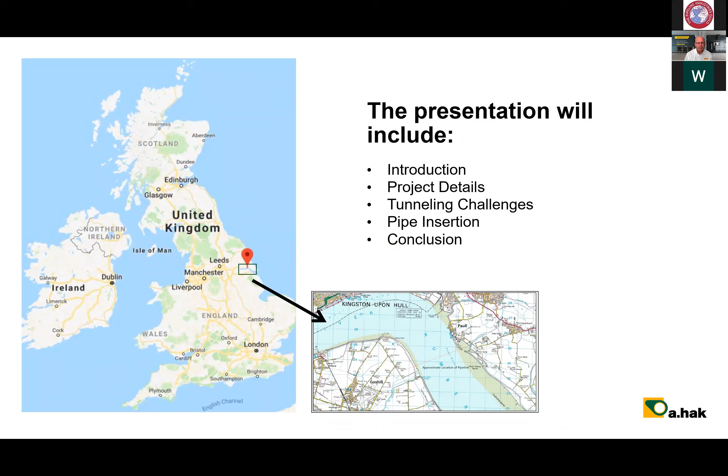What was the business case for National Grid? There was an existing pipeline which was built in 1984. It was trenched through the Humber River, and this pipeline is a very important one for National Grid, transporting 20% of the whole British gas consumption. There were sections of the pipeline at risk because of erosion of the riverbed. There is a tidal difference of 6.5 meters in the Humber, so very, very impressive.

There were some short-term solutions made to protect the pipeline, but National Grid needed a long-term solution to replace this existing feeder pipeline with a long-term stable situation, which, at the end of lots of evaluations, was a tunnel. The project was awarded in 2016. It was decided to build a tunnel and to insert a pipeline in this tunnel.

The award was to A.Hak, Skanska and Porr in the joint venture, and the award was made on the basis of an alternative bid. We as joint venture made an alternative bid, in particular how to install the pipeline, and this method we proposed was the alternative.

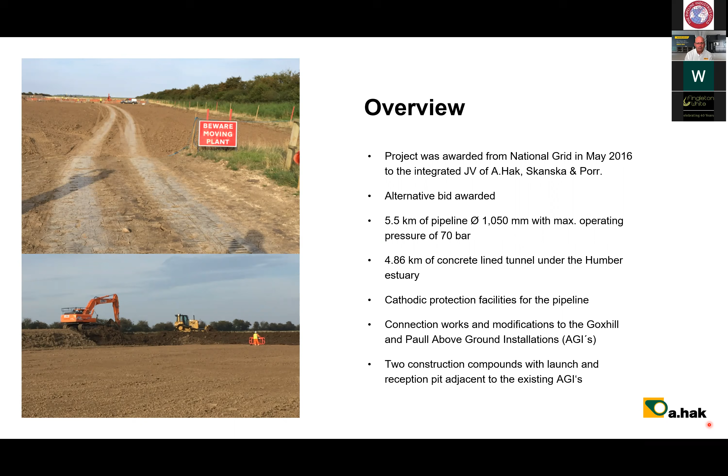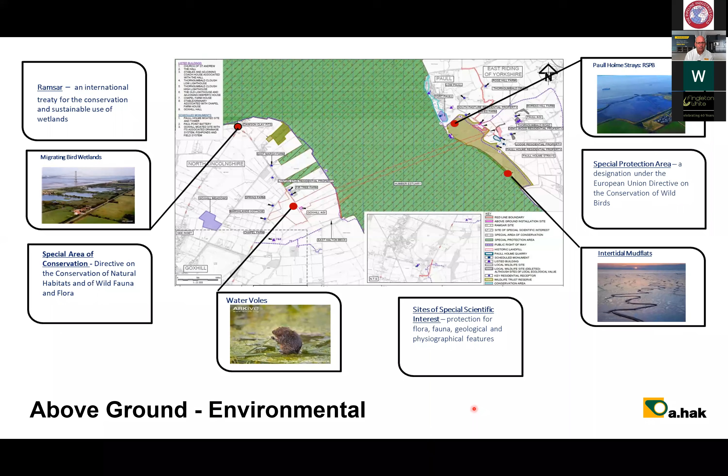Above ground, it was a very environmentally sensitive area, and we had to protect all the wildlife there, badgers, birds, etc., which asked a lot of attention from us, which we did with lots of success, I have to say. Underground, the geology we had to drill in was mainly chalk, and the tunnel was pretty horizontal, going from Goxhill to Paull.

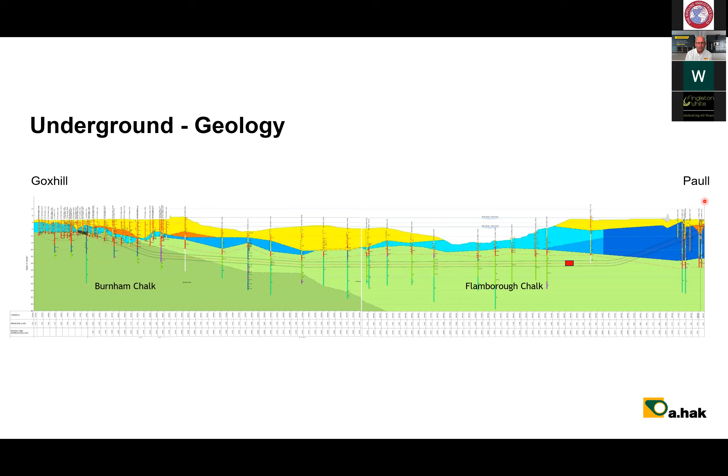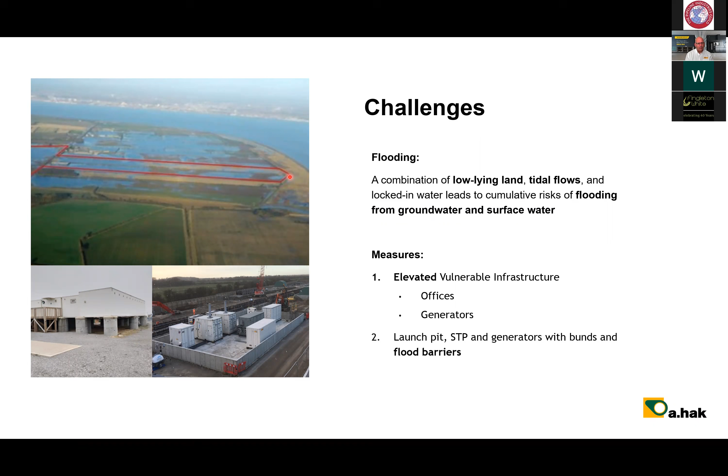Lots of challenges. If you see my dotted red dot, this is the footprint, the area of the project, which was one year before we entered there. The floor was completely flooded. So there was a chance that it would be flooding again under special circumstances. So all the vulnerable elements like offices, generators, etc., we had to lift up to protect ourselves from the water.

Another real challenge was that the tide of the Humber River had a difference in height of 6.5 meters, which had an impact in the tunnel during execution of the tunneling as well, where we had to work in compressed air, where we had to go up to 3.5 bar overpressure, compressed air in the tunnel area.

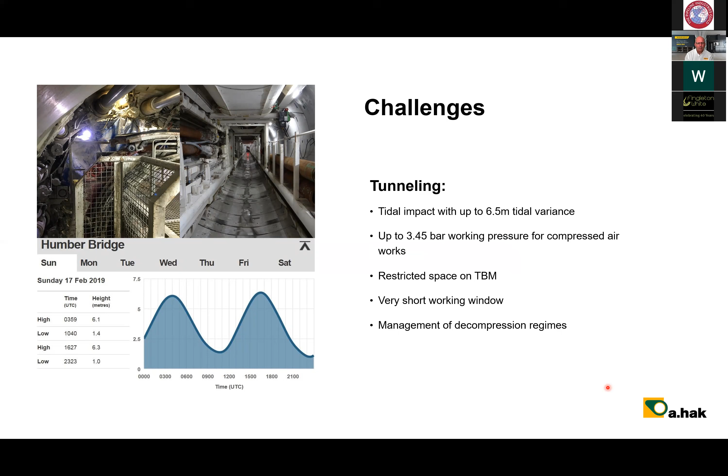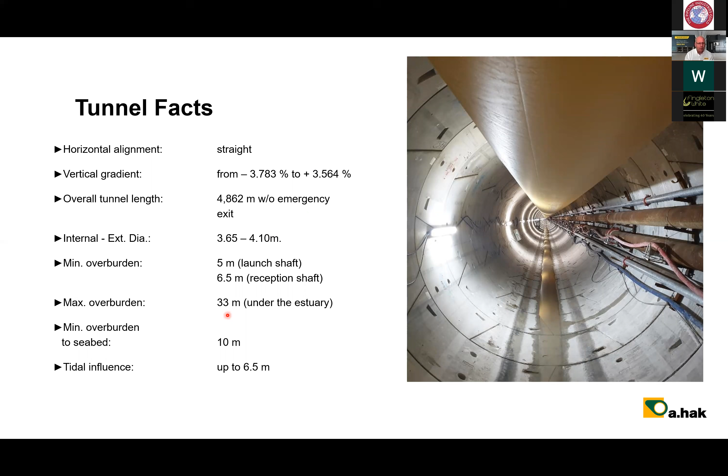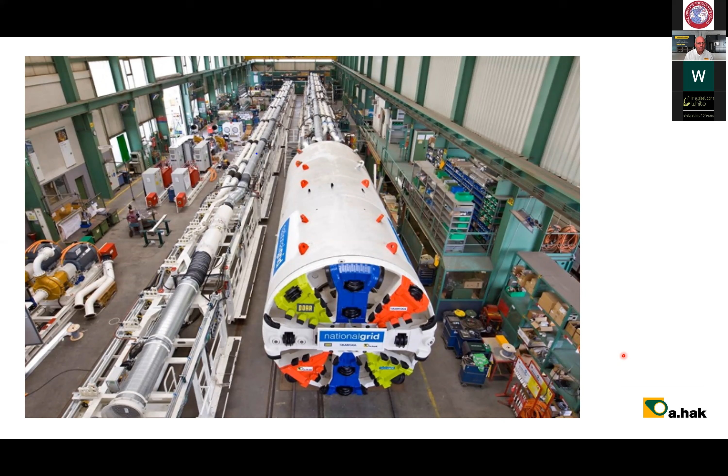The tunnel itself had an internal diameter of 3.65 meters, externally 4.1 meters. It was pretty horizontal, and under the estuary of the Humber River, we drilled with an overburden of 33 meters. This is an image of the TBM, the tunnel boring machine. It was a machine of Herrenknecht, made in Germany, brand new on specifications of the joint venture. It had a length of 110 meters, 500 ton weight, and this is during the factory acceptance test.

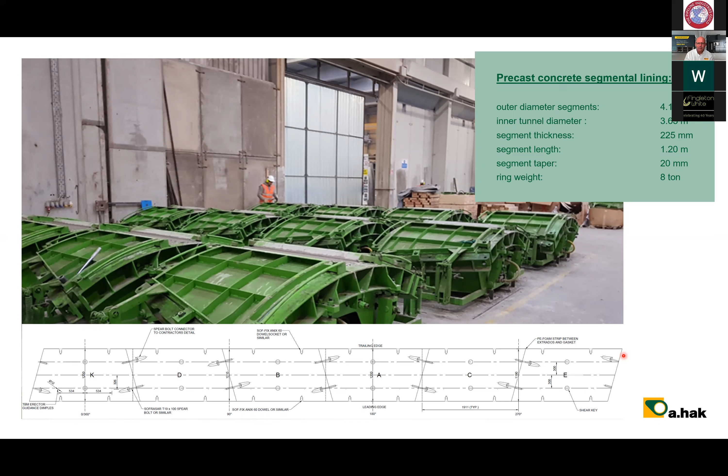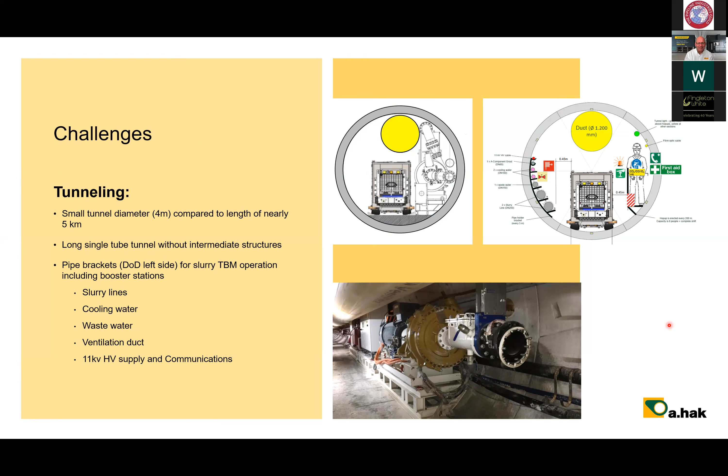We made the segments for the tunnel in Ireland. Every ring had a weight of 8 tons, and here you see the challenge. The internal diameter of the tunnel looks bigger, 3.65 meters, but when you see what to install in the tunnel, like this infrastructure to feed the TBM, to bring fresh air to the front, and then bring the tunnel rings with this machine, then you see everything is pretty narrow.

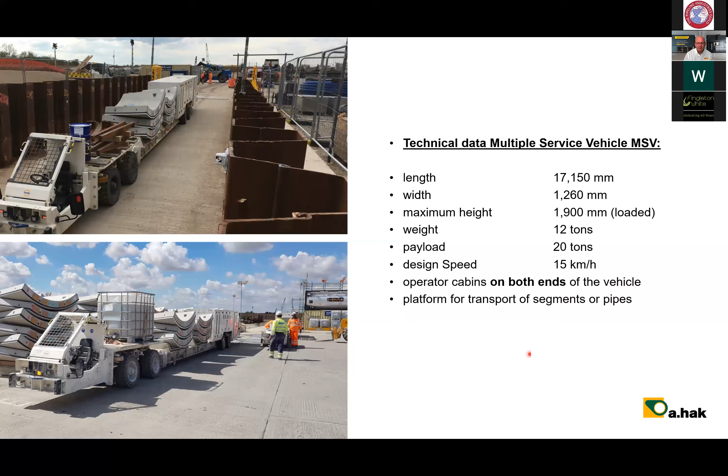This shows the multi-service vehicles, the MSVs as we called them, 30 tons in weight, own weight 12 tons, with a payload of 20 tons of these segments, and we could drive in and out in the tunnel. We did our own safety and training program. All the members who want to come on site or work on site are trained and inducted by us. And here you see, by the way, the office facilities all lifted up to protect the office against the flooding.

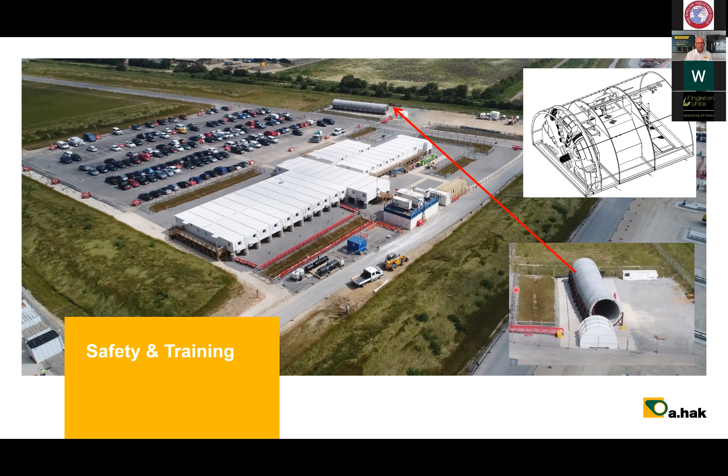As project management, I was in the JV board, and every month we had a kind of dashboard where we tried to capture the highlights and the lowlights on the project in a one-pager, where our project manager had to inform us on topics like safety and quality, production and performance, the SWOT of the project, and the commercial side of life. That is combined with a monthly joint venture meeting and a safety tour, which we did together with the client on all aspects of the work.

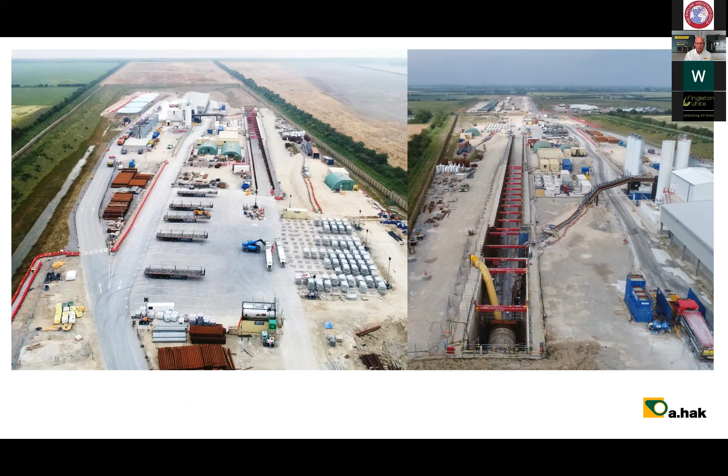Here you see a very nice overview of a part of the project site. Here you see in my red dot the start shaft of the TBM. At the horizon you see the River Humber, and here you see a little bit the dimensions of the project. At the right-hand side at the horizon you see the pipe stock and the stringing yard. So here you see to the Humber, and to the other side, this photo here, the start shaft again, and here you see all the pipe stocked, and the area where we are going to string the pipes to prepare the tunnel.

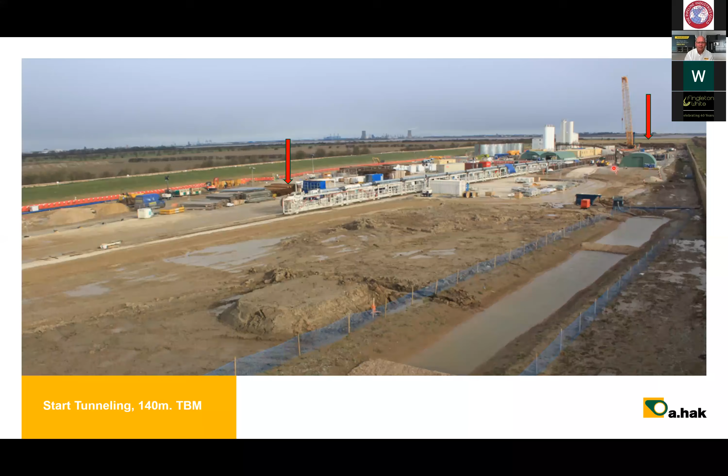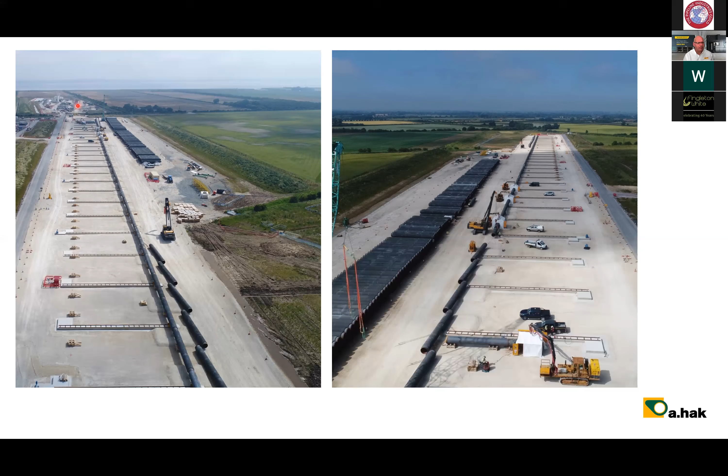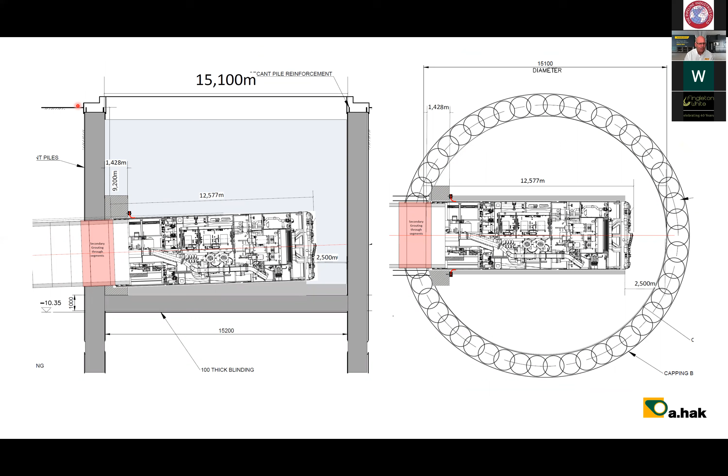So the TBM tunneling took 14 months to arrive in this reception shaft, and this reception shaft had a diameter of 15 meters. This impression shows how the TBM enters into the shaft, and after we take out the TBM, there you see an impression of how we install the pipe and connect it with a kind of gooseneck to bring the pipe up close to the surface.

After we developed our own safety culture program on site, after a few years of hard work, we were recognized as the most improved contractor for National Grid. That was very good for us, having this after lots of hard work, of course, you can understand that.

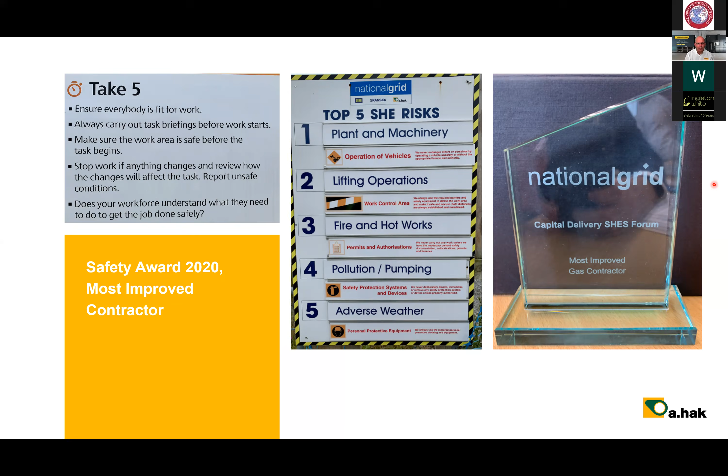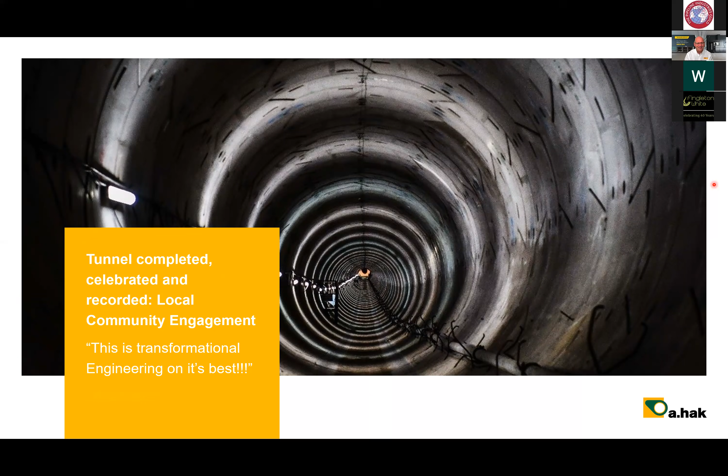When we completed the tunnel, that was really a breakthrough event in itself, and we invited a lot of stakeholders, people who lived in the area, of course some very important people of the client, and one special guest, Graham Boanas, who already crossed the river in a wetsuit, and now we invited him to cross the river again in the tunnel itself. This will be shown in a very short video in the coming minute.

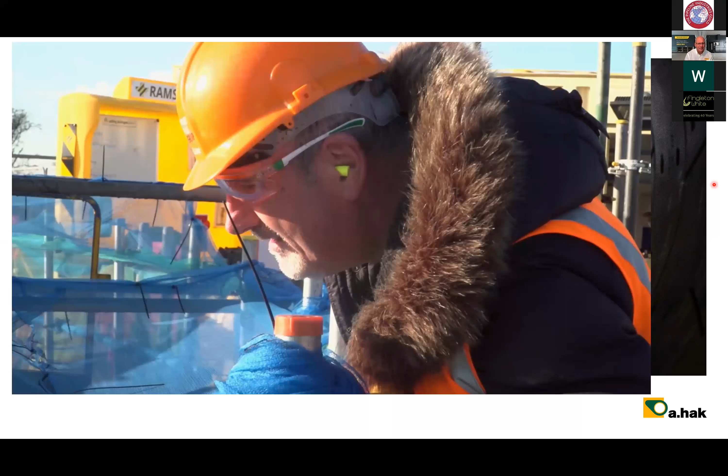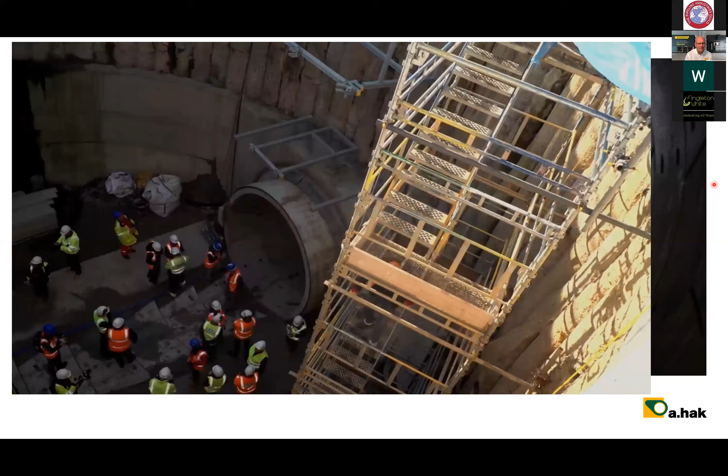We're getting ready to push our 5-kilometre pipeline inside the tunnel. This is going to be a world record breaking event. It will be the longest hydraulically inserted gas pipeline in the world.

We're really pleased today that Graham could come and join National Grid and the project team to celebrate this massive engineering feat of building a 5-kilometre tunnel underneath the River Humber. This is transformational engineering at its best, and we're really pleased that we're able to celebrate this today. It's a massive project for National Grid and for our partners.

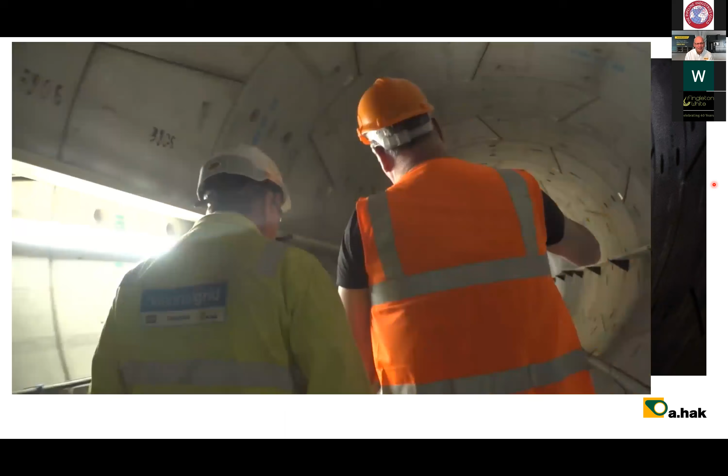Well, today has been a fantastic experience for me. I've actually had the opportunity to walk underneath the Humber, and I don't mean underneath at high tide, I mean actually underneath in a tunnel, and it was just fantastic. What a great piece of engineering. We look at things like the Humber Bridge and what we're doing development-wise in the city, things like the wind industry, and then we look at this and it's just a fantastic piece of engineering. I didn't even know it was here, and many of the people in Hull won't know it's here.

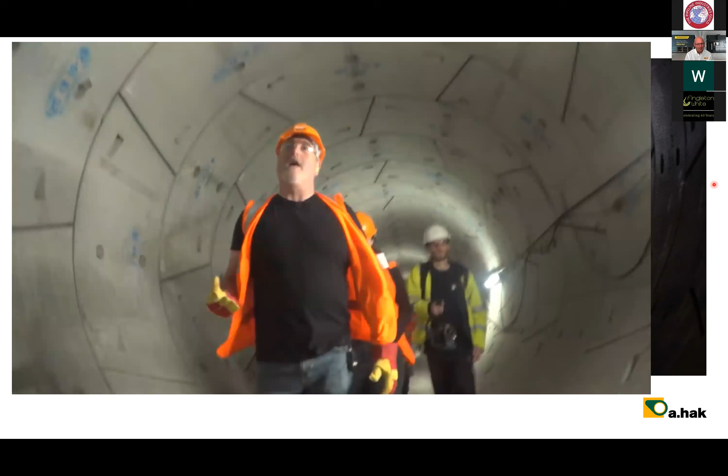Talking to one of the guys down there, it was fascinating to know that now it's finished, they're going to fill it back up with water. So we've walked in it dry, now it's going to be full of water. Amazing. I must now hold the record for being across the river in the most different ways. I've done it at low tide, I've done it at high tide in a special suit underneath the bottom. I've even walked over the bridge, and this one's truly unique. It's been a fantastic experience and a big tick box for me.

Yeah, I can show you lots more videos. We had the BBC on site, but maybe I'll share it with the guild for the records. But yeah, this is it. Now we go to the real work, the pipe insertion, in a nutshell.

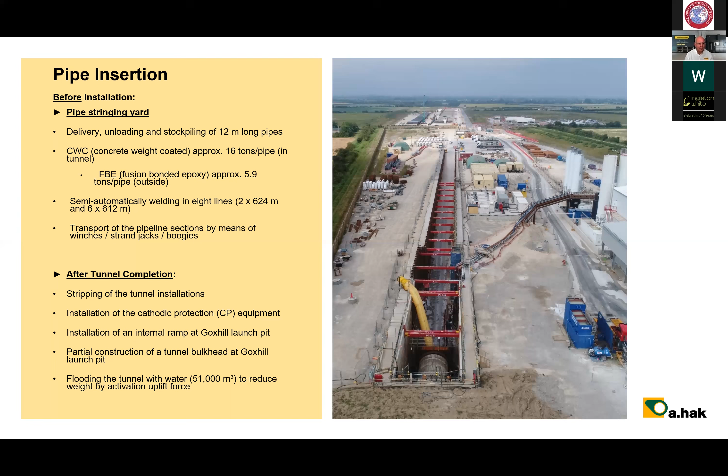During the tunneling excavation itself and during tunnel work, we were already preparing the stockpiling of the pipes. We welded them semi-automatically and transported them into the firing line. After the tunnel completion, and after the machine was completed, we had to strip the tunnel, install the cathodic protection, and flood the tunnel with water again. This is an impression of how we brought all the pipes from Scotland, where they were produced in the factory with concrete weight coating.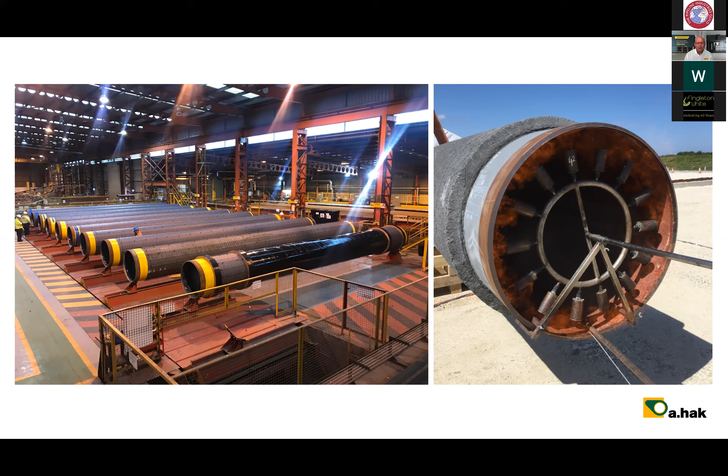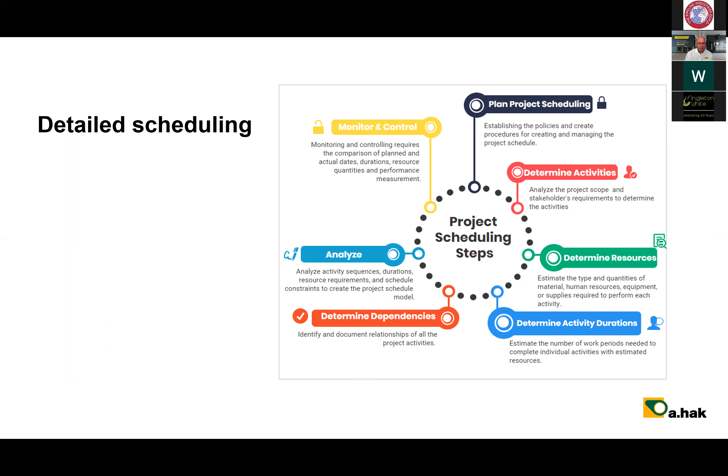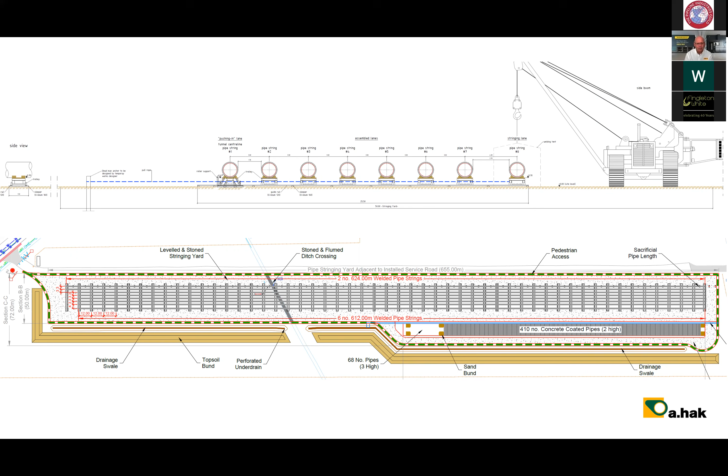The pipe insertion activity was never done before on a scale like this, and it needed a detailed scheduled chain of activities with all the witnessing and approval steps well prepared and scheduled. This is a sketch of the stringing yard to stock 410 pipes and to weld them into 8 strings. Here you see the stringing yard realized in its real dimensions.

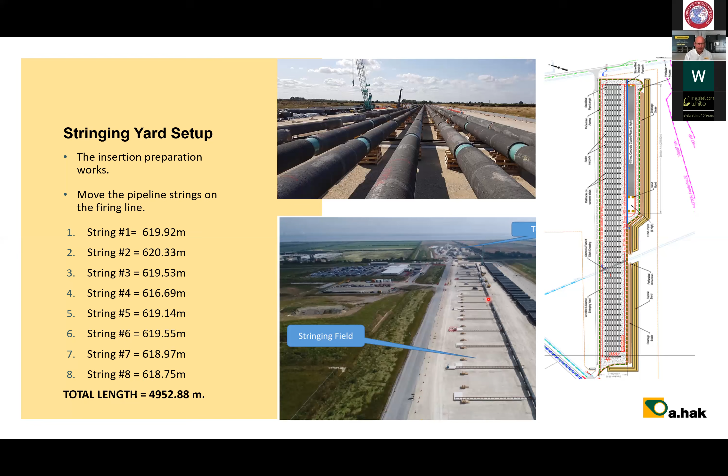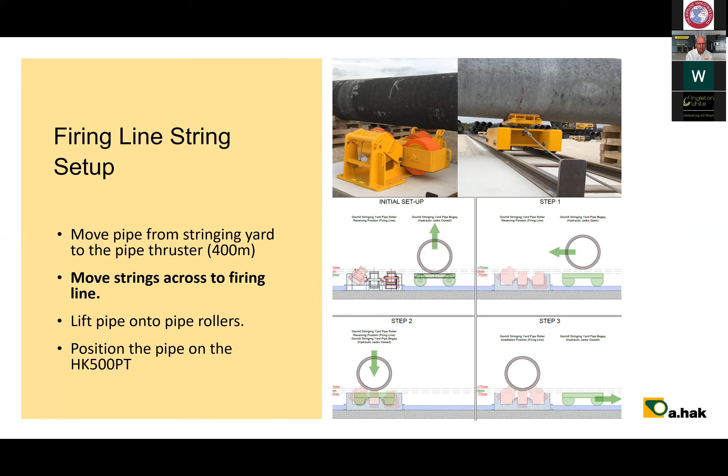All 8 pipe strings had a length of over 600 meters, and the string at the left side of this photo, here, you see it in the firing line. With a smart rail and bogie system, we were able to winch the 600-meter pipe strings into the firing line after the first string was positioned and pushed into the tunnel.

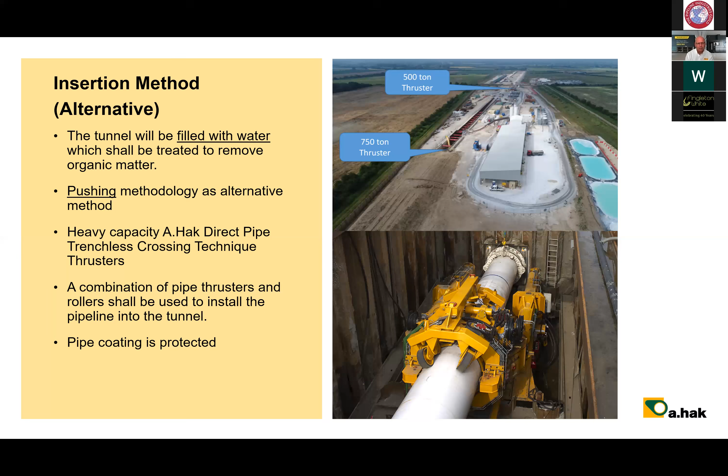For the insertion method, we filled the tunnel with water, and the selected method to install the pipeline was by pushing the pipeline into the tunnel. We as A.Hak own 2 heavy capacity thrusters for Direct Pipe trenchless technology, and these thrusters were selected to push the pipe into the tunnel. The combination of the pipe thrusters and the rollers would then push the pipe into the tunnel. The concrete weight coating helped to protect the pipe coating, together with collars, which were installed before insertion.

The selection of pipe thrusters had some positive advantages. The pipe thruster allows for better and continuous control of the pipe string installation. It minimizes rotation during installation, minimizes uncontrolled movement risks, and really reduced the installation time. The cross-river communication is not as critical as it is in a winching operation. And the equipment used to push the pipe in can pull the pipe out when necessary, as a contingency measure in case of problems.

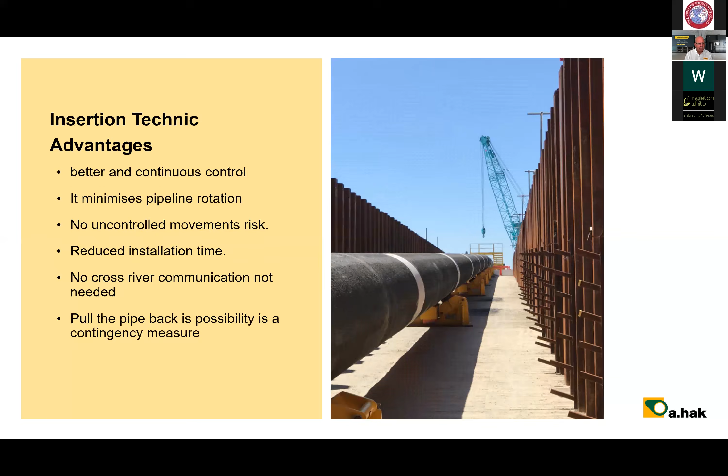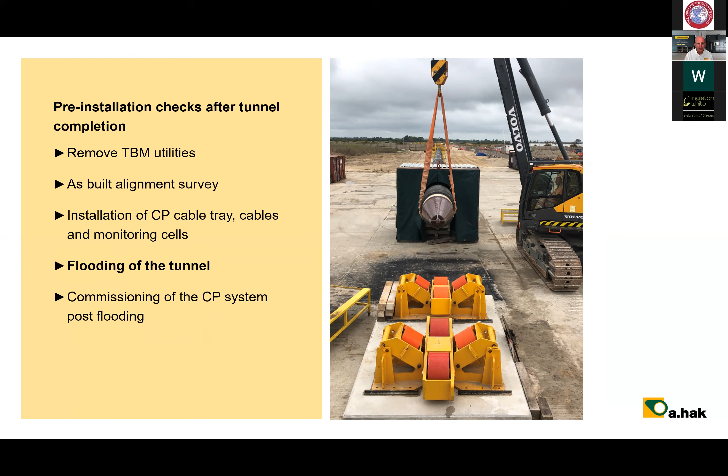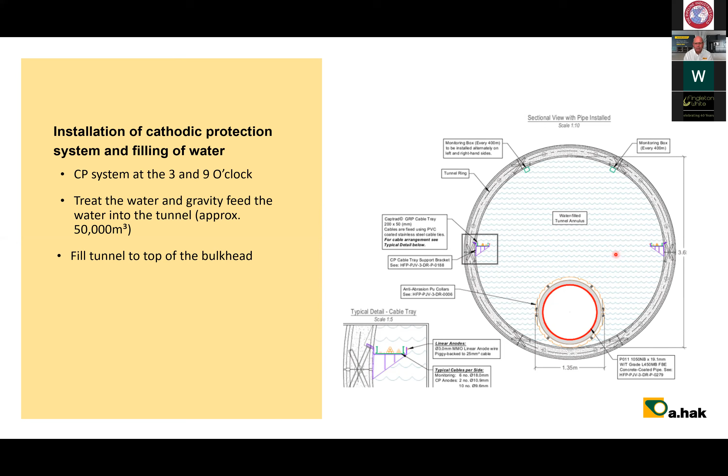Lots of tunnel commissioning checks had to be done before the tunnel had to be flooded. The CP system had to be installed. TBM utilities had to be removed. We installed this CP system at 9 and 3 o'clock.

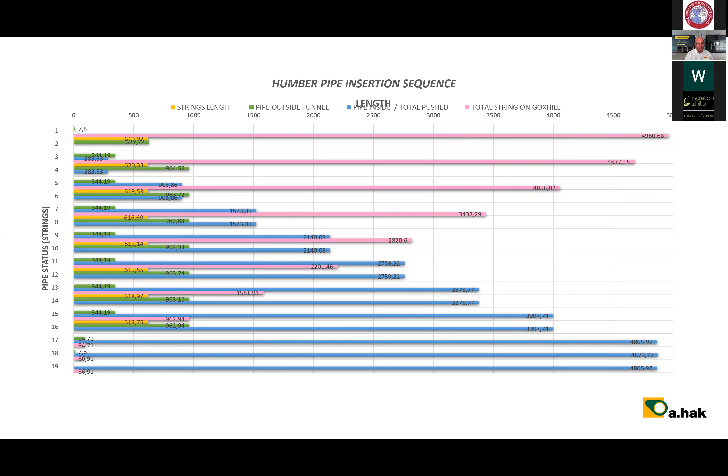And as part of the whole preparation, the insertion was simulated by BIM, and lots of workshops were held, as well as several peer reviews. And this overview shows all the 8 strings in and outside the tunnel over the insertion, where with the previous overview, this led into a calculation of the weight of the string in and outside the tunnel.

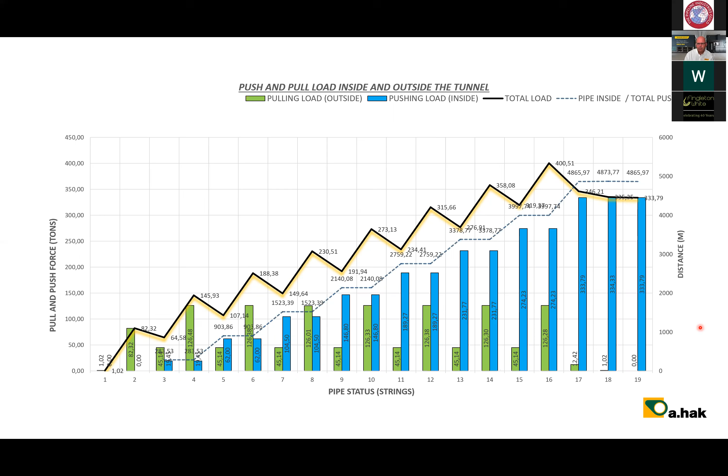And with that, it all led into calculating the push and pull forces which were needed to install the pipe. And the calculations gave that an expected force of a maximum of 400 tons was needed to push the pipe into the tunnel over the length of the 5,000 meters. And with these calculated forces, the engineers double-checked whether the tunnel and the pipe should be intact after installation.

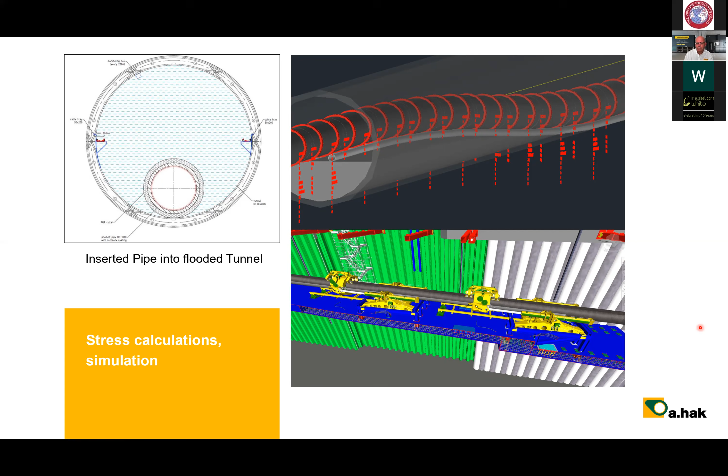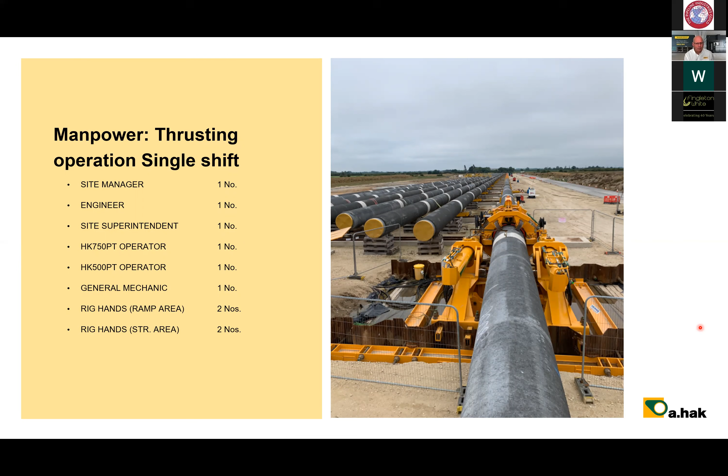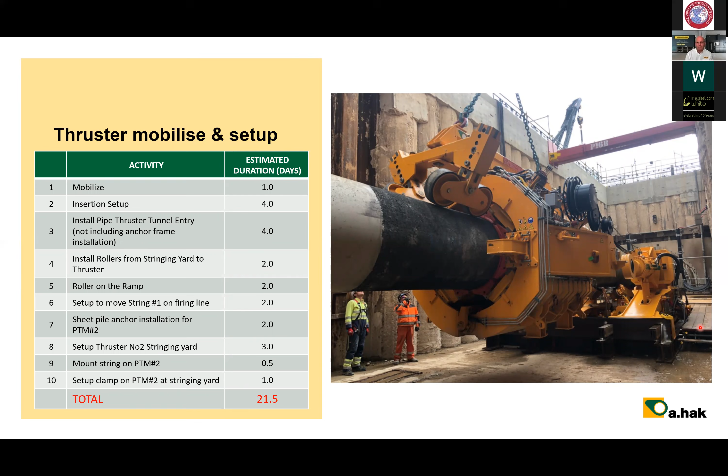So we needed 2 thrusters and all the rest to let the thrusters work, of course. The whole operation of insertion was controlled by not more than 10 crew members, excluding the welders who had to weld these strings together. We expected to need 22 days to install and do all the acceptance tests for the machinery. And these thrusters have a stroke of 5 meters, and every 5 meter stroke of the thruster, we expected to have a 20 minutes operation per stroke.

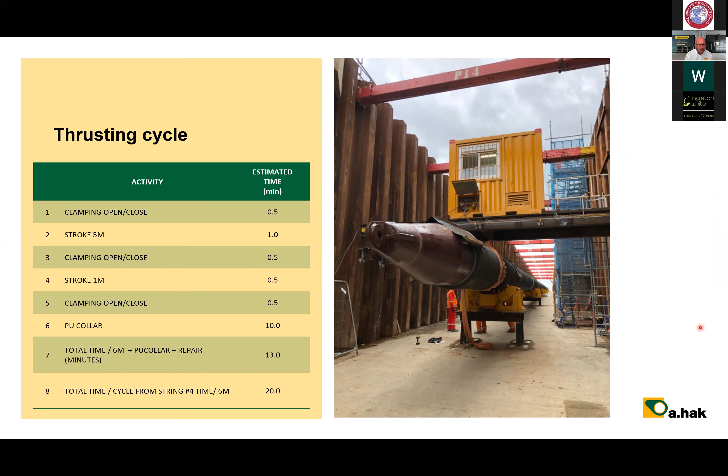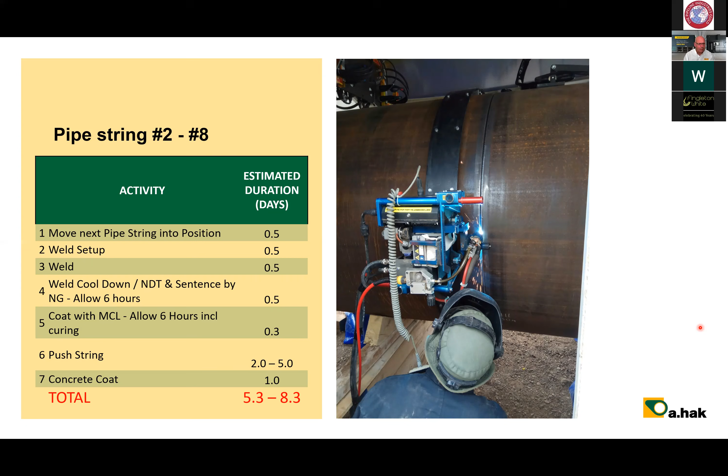We expected to need 5 to 8 days, including looking at wear and tear of all the machines and rollers, to install every string. At the end of the day, in practice, we needed only 2 days to install and 1 day to connect the string. So that was much better than expected. The whole window of installation, setup, demobilizing and installing the pipe, we expected to need 109 days of this whole insertion operation.

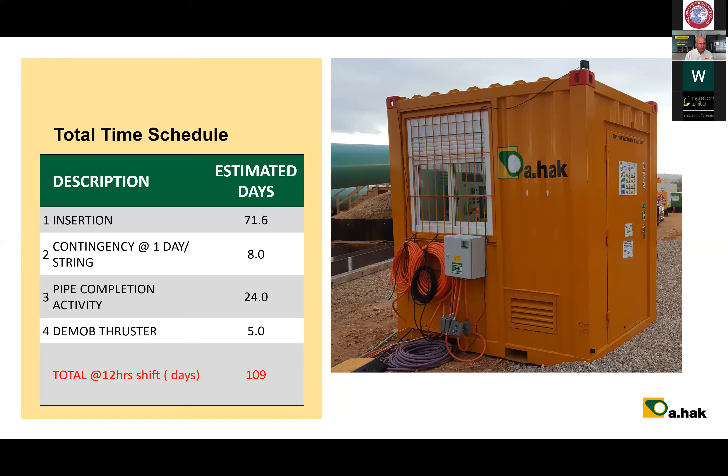Here you see the impression of the setup and installing the 500 tons thruster. And here, shortly before the tunnel mouth in the shaft, there we installed a 750 tons thruster. And here you see at the right side the pipe rollers along the insertion line, leading the pipe into the tunnel entrance. Here you see the PU rollers, specially developed.

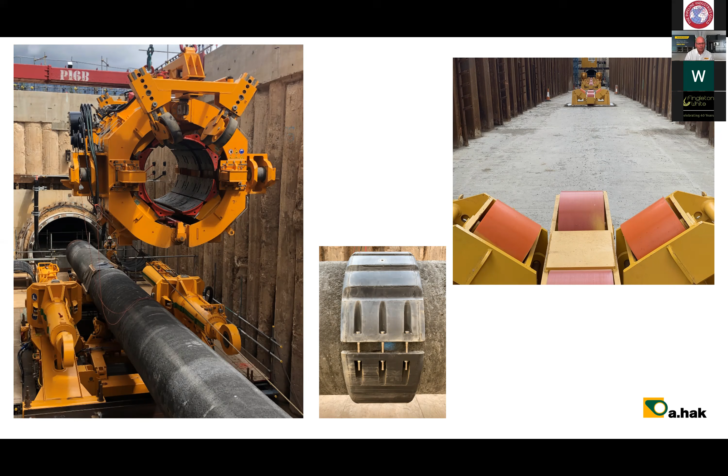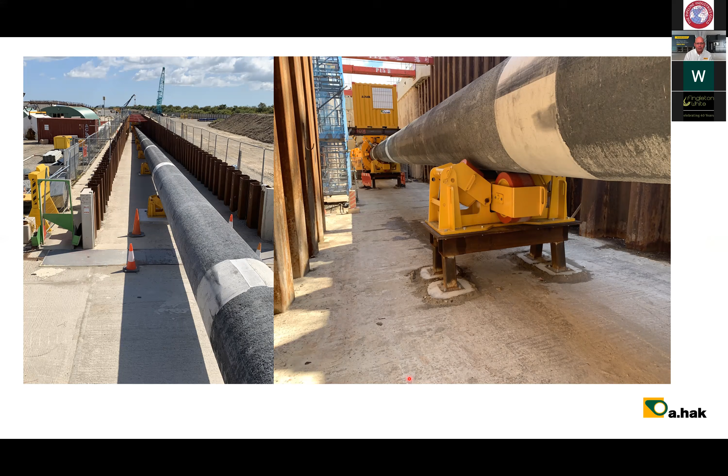Left-hand side, here you see the pipe traveling over the rollers to the tunnel, and here you see how the pipe rolls from the stringing area up to the tunnel. Here you see the control cabin and the 750 tons thruster. And there you see the pipe entering the tunnel, and there it starts to float into the water. Well, during the installation, we saw the stringing yard getting more and more empty, and that is what it was all about.

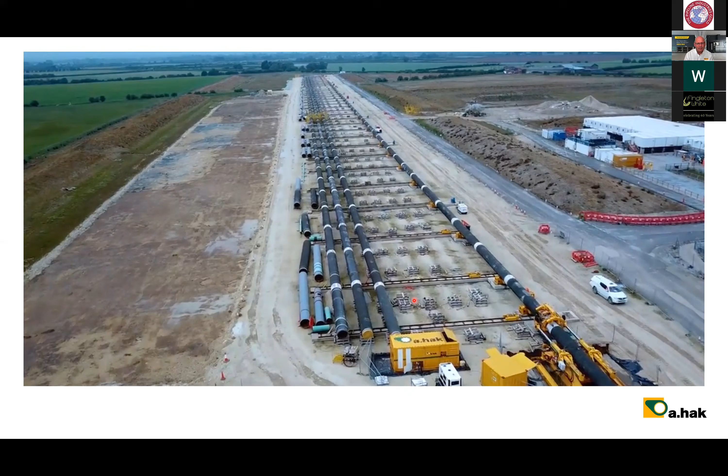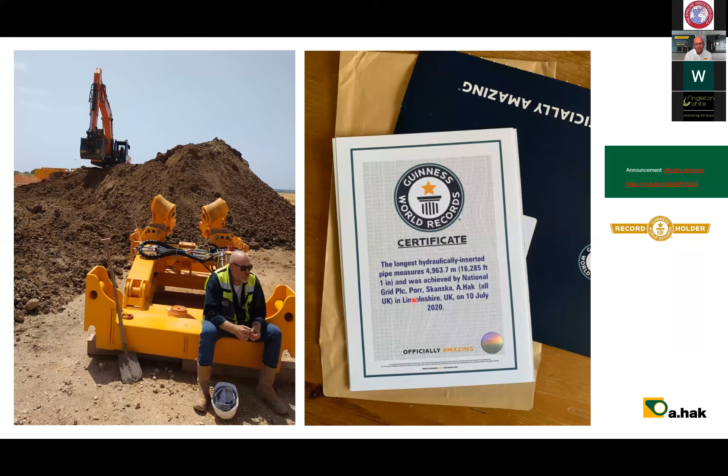And finally, after 4,963.7 meters, the pipe reached the other side of the River Humber in the reception shaft. And then finally, the work was done, and we received a certificate which said we were officially amazing. So after finishing the installation of the pipe, the tunneling and pipe insertion was successfully completed. The pipe was delivered. It was done safely according to health and safety regulations and our own restrictions, if you like, only because of the great commitment and performance of our site team.

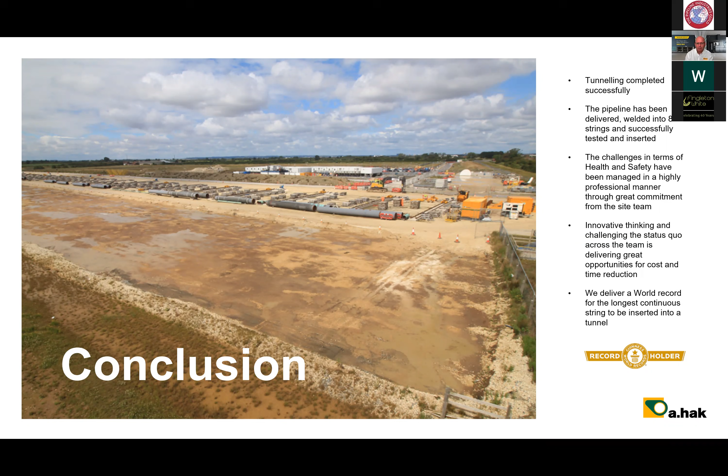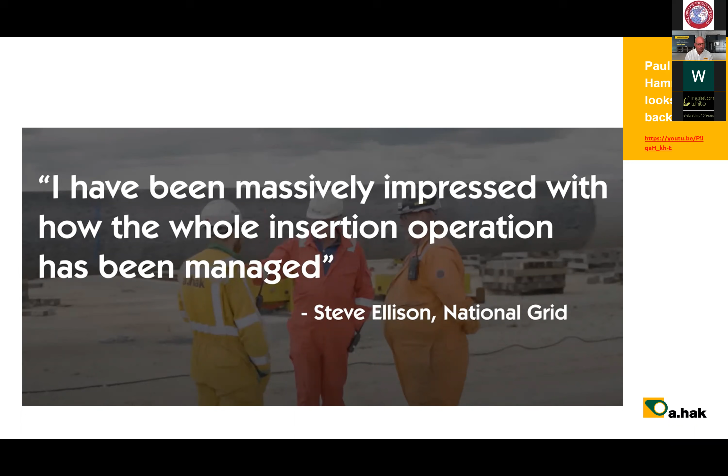Innovative thinking and challenging the status quo of the team gave a great opportunity to meet cost and time in installing this pipe. And we delivered a world record for the longest continuous pipe string to be installed into a tunnel. The last 1 minute video is made where Paul Hammond, one of our pipeline engineers, looked back on 5 years of working on the Humber River project.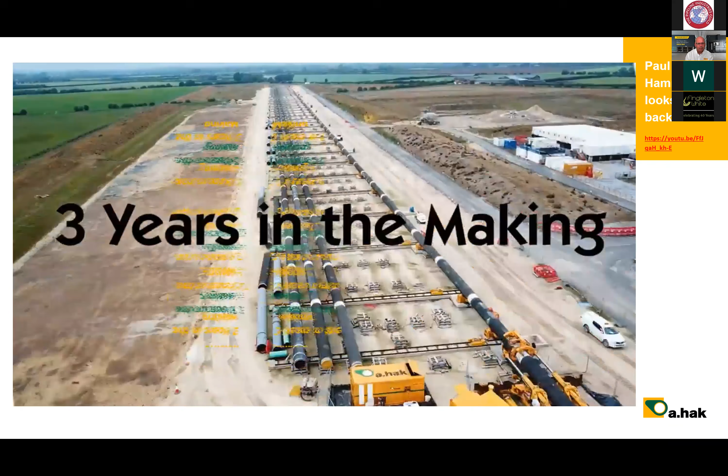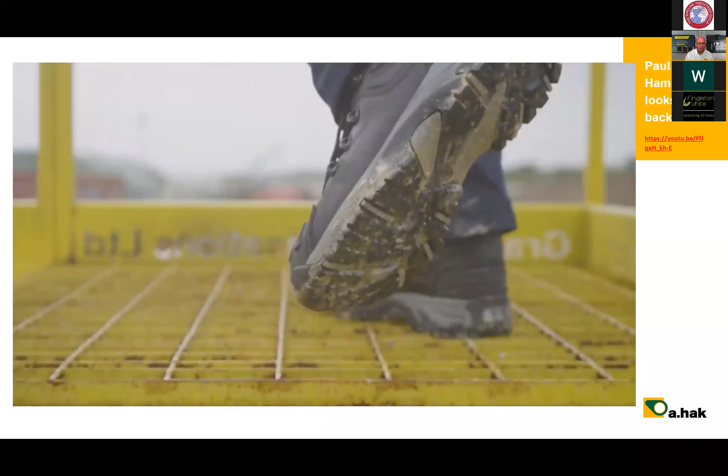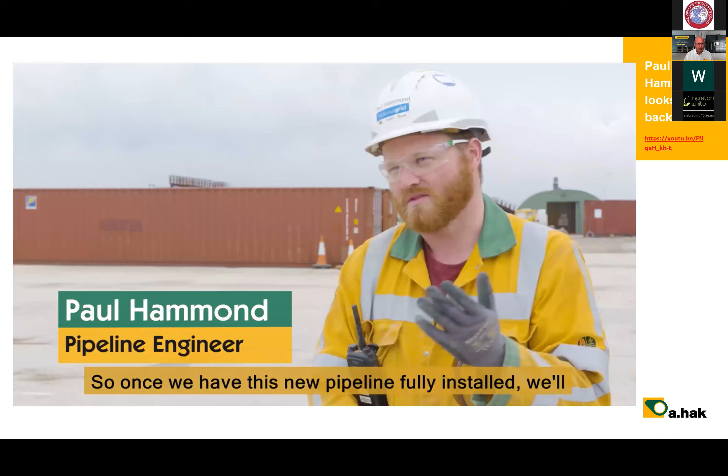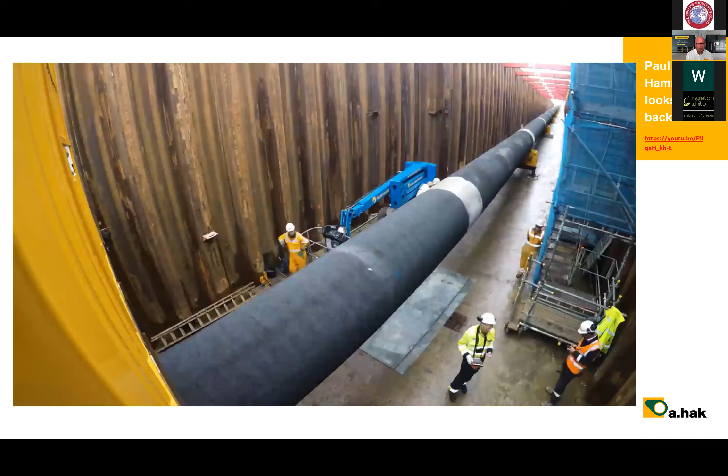My name is Paul Hammond. I'm the pipeline engineer for A.Hak. The original pipeline has become slightly endangered; over the years the tide has washed away the cover and it started to pop up. So once we have this new pipeline fully installed, we will decommission the old one in the riverbed and divert the flow into this new pipeline. It takes about a day and a half to push that 600 metre long string into the tunnel, and then we spend half a day welding the next string on and coating that weld, ready to push again.

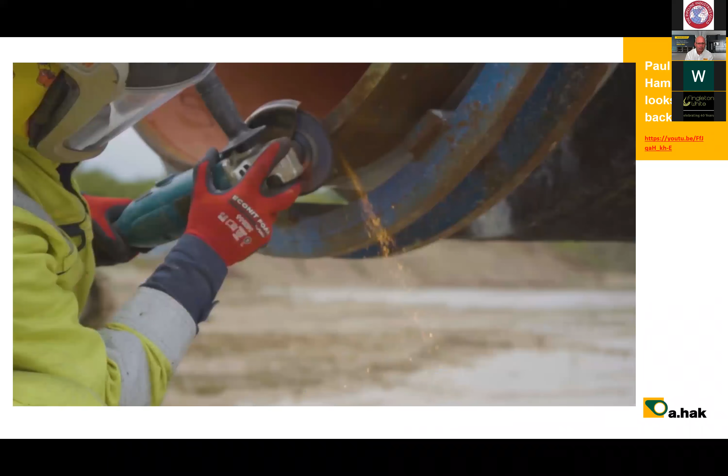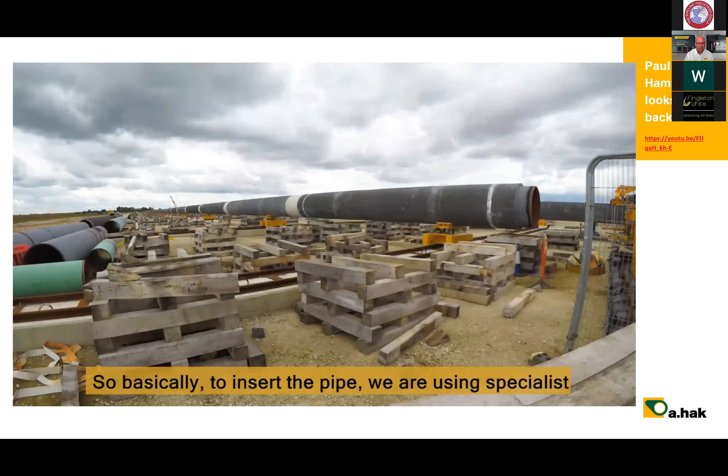So basically, to insert the pipe, we are using specialist pipeline equipment. 2 pipe thrusters, one in the stringing field behind you, which is a 500-ton machine, and the one at the front, which is putting it into the tunnel, is a 750-ton machine. It extends, travels along the pipe, it re-grips the pipe, and then it pulls the pipe directly into the tunnel.

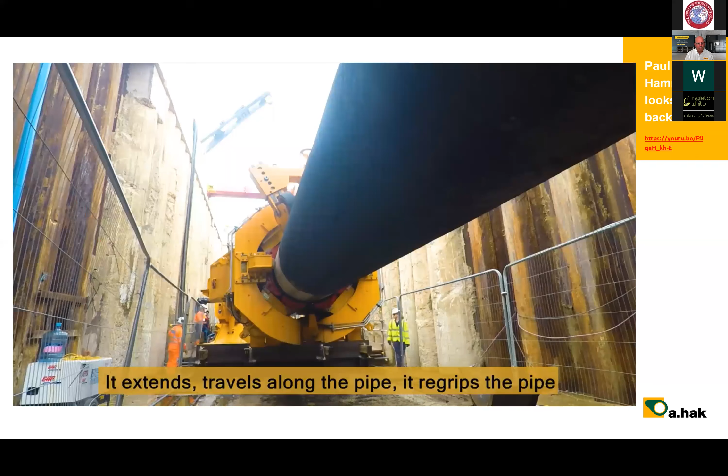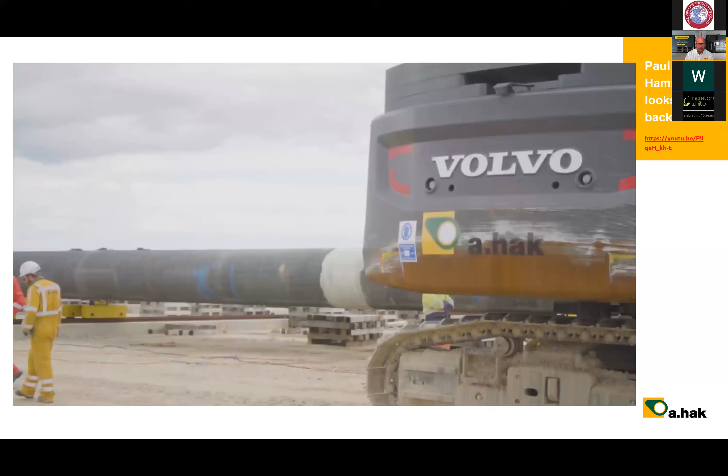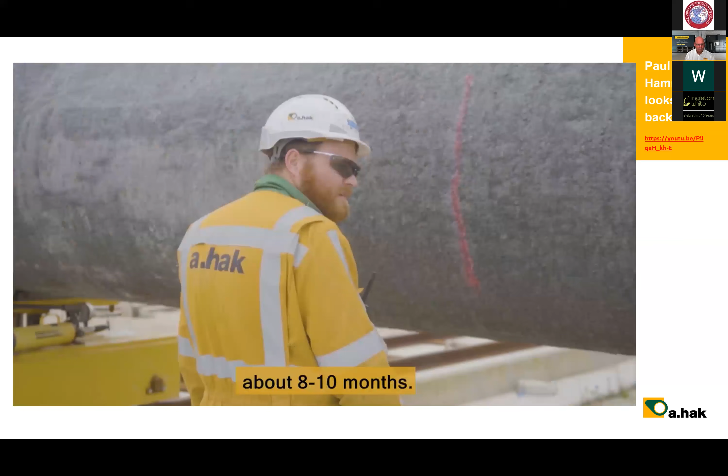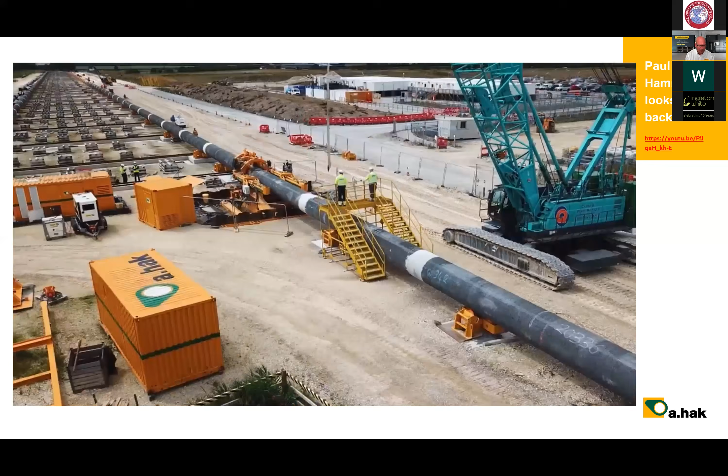If it keeps going well, we should be finished in about 8 to 10 months. Yes, so everything you see here will be either buried or completely removed, and it will be back to farmable land again. Proud to be part of the A.Hak team, which has undertaken the world's longest pipe insertion. It's been a challenge, but it's been a great experience.

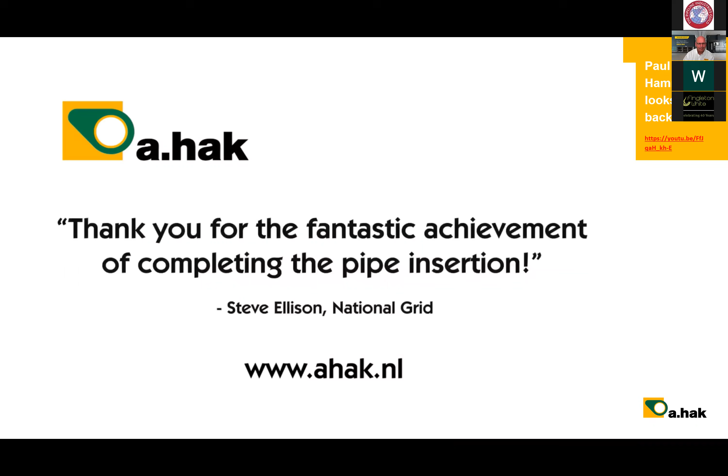Well, thank you very much, Wilco. That was absolutely superb. And it's so wonderful to see the technology of these pipe thrusters, but also the fact that from the very beginning, when you formed with your colleagues at JB, you had an alternative bid, as in a solution that you as a contracting entity together thought could do the job, and clearly it did the job so very, very well.

We are getting some questions, so I'll start going through some of those. Obviously, the videos also helped us to understand exactly what happened, and quite a few of the comments are actually congratulating the whole team on what you managed to achieve.

I think a great comment from Phil Croft there, that sometimes we forget to celebrate engineering and construction achievements like this, which is absolutely incredible and should be praised so much, particularly for the end of the project to be at the beginning of this global pandemic. It's wonderful to see positive things about what teamwork can do, and it was obviously from your images, Wilco, so neat and tidy and looking safe, and also good to see how your safety performance was recognised by National Grid.